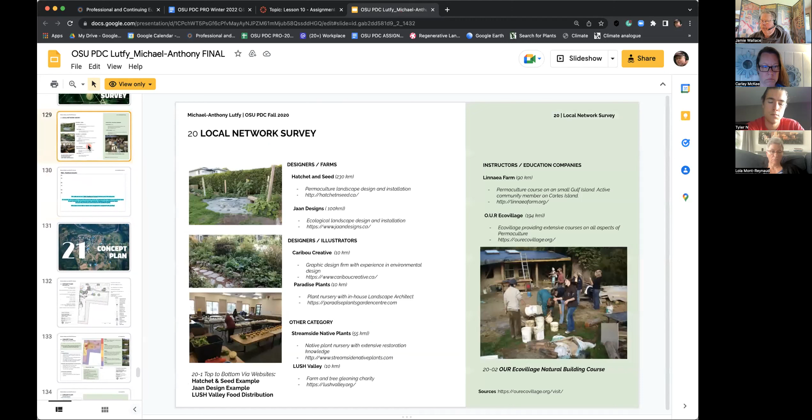And that part of the assignment is pretty brief. But the main event, of course, is the concept plan. So this is where we're going to pull in a lot of your work from previous weeks, as well as building on this a little bit.

So we can see the concept plan. Now, this example may not include all the things that we've asked for, because we have changed the template just slightly over the last couple of courses. So here you can see that we do not have a base plan.

If we go back to the concept plan and what's being asked for, we definitely want to see the existing plan. So it's just a matter of copying and pasting in your site plan or your base plan into that first sheet. And then the concept is exactly that: what is the overall intention of your design?

In this case, this is actually a nice way of doing it, where we have the base plan sort of diminished, in a grayed out format. And then all those new elements have been dropped here in color, which makes it really easy to see what some of those new intentions are.

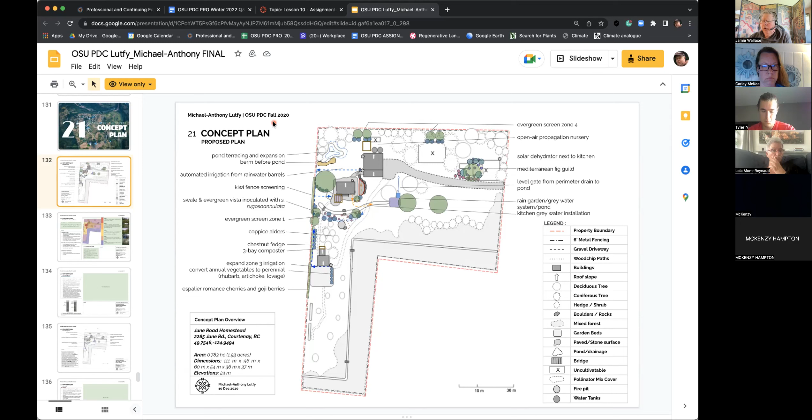And if we go to the next section here, we're looking at design goals and the proposed zones. So this is always a really interesting part of the design, to see how this concept has affected the proposed zones versus the existing ones. Sometimes that can be quite subtle, and in other instances it can be a little more dramatic, depending on the existing conditions. But in this case, it's pretty obvious.

So we want a statement of purpose - there's always a reason that you're creating the design. Just a kind of broad overall purpose and mission statement, and then some specific goals that are really helpful. Here there was privacy and an increase in diversity and native beneficials. That's great to see.

There's a note here about some of the changes to the proposed zones, which is very interesting, and then of course some images. So this one sheet tells you quite a bit about this person's drawing. Okay, so that is the concept plan.

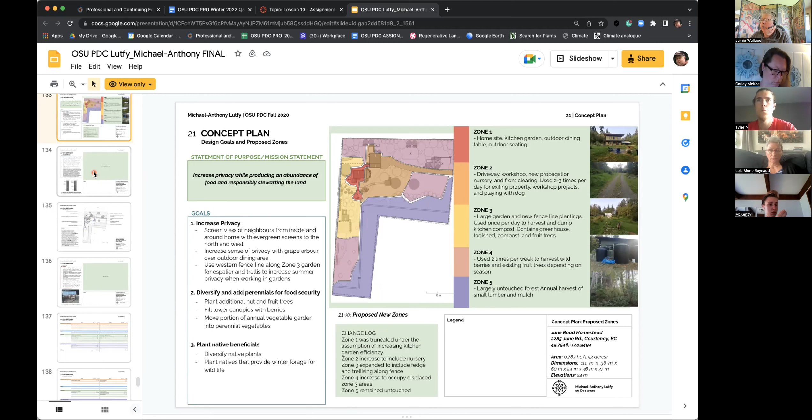So the next sheet that was included was a water management plan. When my wife and myself, our company, do a design, it's slightly different, but we definitely prioritize water, and I would encourage anybody continuing with this kind of work to also really dial into that with all the drawings. We really feel that drives the landscape. But again, this has some really good elements within it.

And this is 2 pages - the person couldn't fit all of this information on one page. So there's some notes here for rainwater catchment, for slowing down water using the gray water, and some micro irrigation, a little bit of earthworks. And then a note here about an existing pond and a level gate for the rain garden.

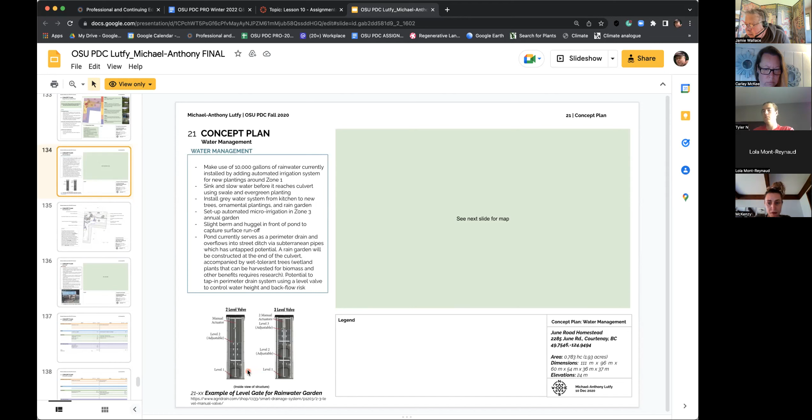I haven't taken a look at this, I'm not exactly sure what they're trying to do. I'll have to take a look at that in more depth. And then the drawing itself with some nice labels here and some notes.

So one of the things I always try and do is set up a design sheet so that if nobody knows the site, they are able to navigate through the drawing as best they can with clear drawing, clear labels, and these notes here. So without explanation, we can tell quite a bit here.

We can see the water flows, we can see the intention of a swale, some irrigation expansion. There's a large rainwater collection system here that then overflows into, I believe, a berm or a pond. So there's a lot of really interesting items in here, and that's great to see.

Now, of course, on acreage, you can do more with your resources. But one of the things that I hope people are taking away from the course, with regards to water management, is to interconnect all of your strategies. So it's great to harvest rainwater, but what happens when that system has been filled? Where does the overflow go?

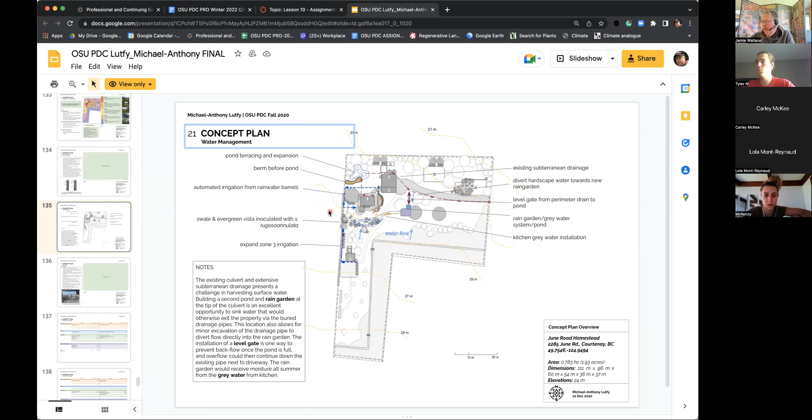And again, we have some notes here. The next slide looks at the soil fertility plan. Here, a very broad brush approach is being applied to increases in soil fertility. So instead of a silver bullet, a one-shot approach, there are multiple approaches, and this is great to see. This makes for a more resilient approach to improving soil.

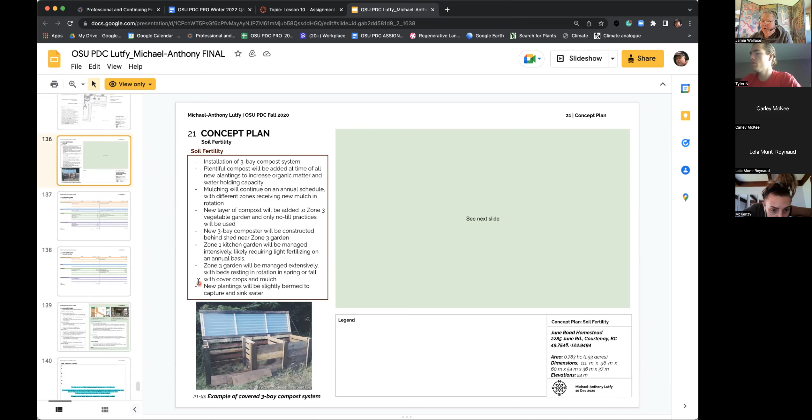So that's compost and how the mulching is going to be applied, the composter itself, what to do with the kitchen garden waste, intensively and lightly fertilized areas. So different approaches for different areas.

And that's pretty much how I'm sure you'll see your project sites as well. So if you have a kitchen garden in zone 1, it needs a lot more maintenance, and it's also going to require different soil management practices. If you're getting 2 or 3 crops a year out of your kitchen garden, extracting all these crops, you're going to want to really think about how you can add back to the soil all of that biomass you're removing.

Then we go on to the phasing and the budget, and this can be pretty tricky, admittedly, but there are some obvious things, and often infrastructure is one of them. So any earthworks or work on your water is often at the beginning of any project. Once you get to actually planting, typically with our workflow, we're getting towards the end of the project—these other items come first, mainly because the planting is really like the icing on the cake. You wouldn't want to beautify an area and then have to go and undo something or tear into it. So hence doing your infrastructure early.

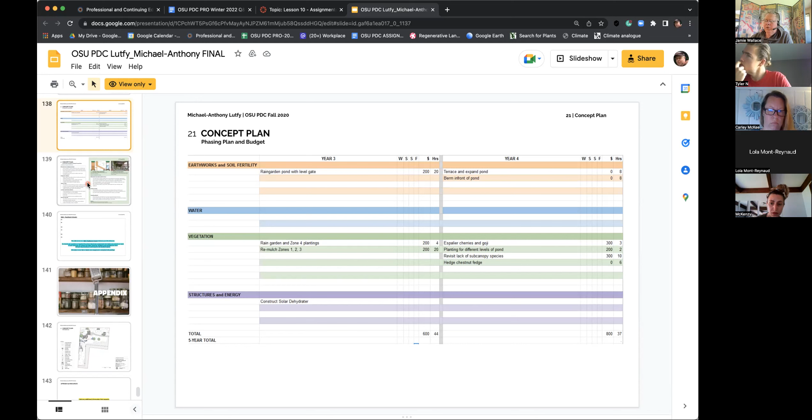And eventually, after you've done it a little while, you can almost start narrowing down these costs into per square foot values. So if you're creating 1,000 square feet of planting, odds are you might be able to nail it per square foot. For us, we're probably starting in and around $10 a square foot, and it may be higher than that. It's not any way to bid it by any means, but it does give you some rough ideas on how to go forward with that part of it.

And that's probably one of the most challenging things about designing: coming up with a great idea, and then trying to determine how much that's going to cost. That can be quite tricky, and it really goes way back to our first assignment, where we went through the client questionnaire and saw what their budget—I won't say can handle, but certainly dialing into what's realistic for the client and what the design is going to be. After you've done it a while, you try to keep that in the back of your mind as you're designing. But that is a little bit tricky, and it does take time to get used to.

All part of experience. So the last part of the assignment here, we're looking at principles and social permaculture. These are pretty straightforward. It's very interesting to see how some of these principles apply to the design you've done.

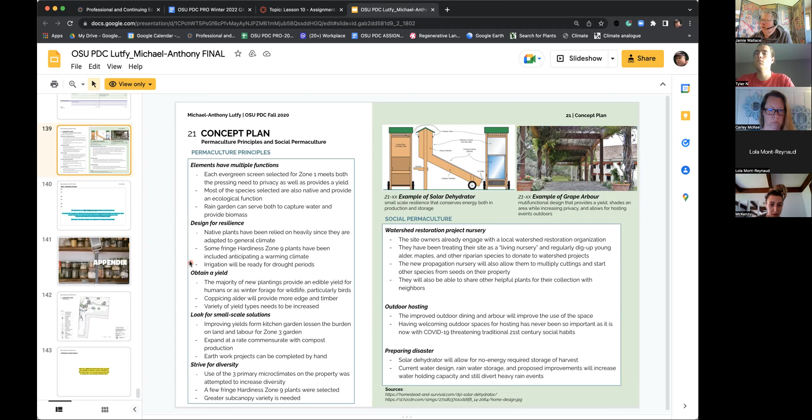And that's about it. So that is one of the student examples.

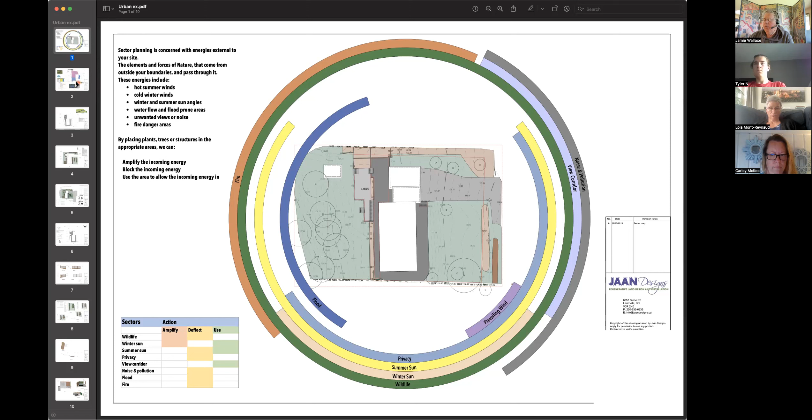So this is how we would do our sector analysis. This is one of the first things that we show our clients and get feedback from them before we proceed any further, because we would definitely want to make sure that we're covering this off before we put some ideas to paper. And then what we do after that is we jump right into the water layer.

We're looking at all that on-site water resource and what we're going to do with that. In this example, we're taking water off of the roof and the patios, and we're sending it into a rain garden. We put a little example of what a rain garden might look like, and some numbers, some catchment numbers, what's coming off the roof.

Based on our annual average rainfall, which is around 1,100 millimeters per year, we're showing all the impervious surfaces here, as well as a micro watershed. So this is a Google Earth image where I got contour information, and we could track just how much water flows from uphill behind the site.

It's very interesting because we've been on that site for a couple of years now doing different phases of work. And there is a huge volume of water that flows along this hardpan layer that's about 3 feet deep that we encountered when we were building walls in the back here. So it is a substantial volume, and fortunately we have planned for that and are making use of it.

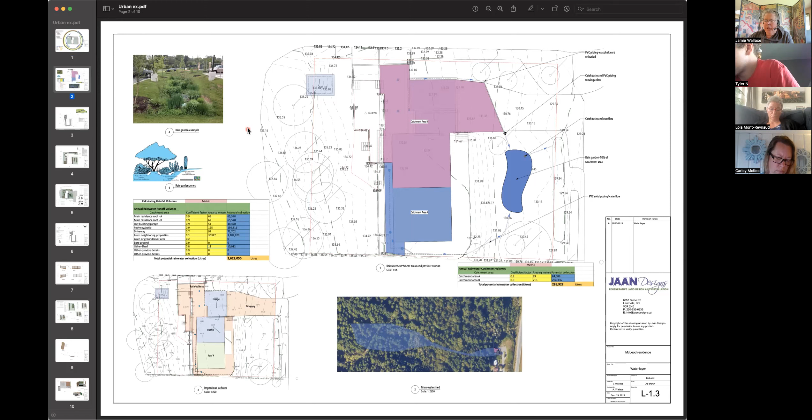So the next thing we look at is access, and that's kind of taken from the Regrarians platform where there's 10 or 11 different layers, but access is a biggie. So that is foot traffic patterns. For us, that's patios.

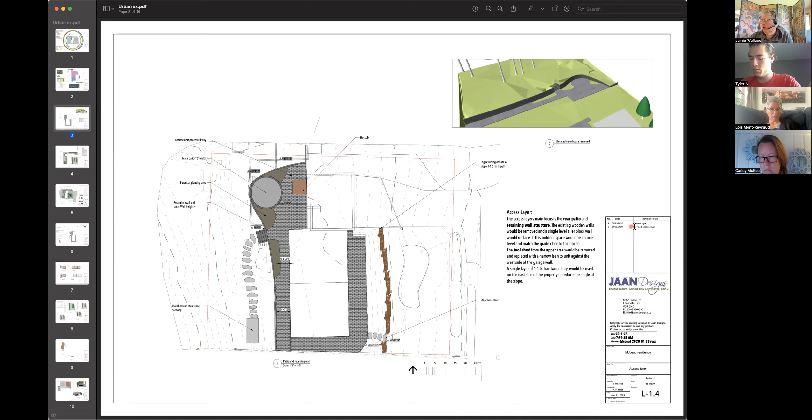You can see there was an existing railway tie retaining wall here that we're going to remove and put in a new patio with some plantings. Not a huge change, just expanding it a little bit. And then we have a little 3D image of it, and then some notes. And then you can see here we have revision notes - so we presented that, and then we've revised it a little bit based on feedback.

And then we get to the soil layer, which is all that living material. And with this wall, we're planning to soften it from behind and in front. Uh-oh - I'm just going to bring up a couple of pictures of that. I can find out.

Okay, we'll let that load while we're looking at this. So yeah, this is just looking at soil. And when I say soil, that's all living things. So these are intentionally planted areas. This is turf, it's an enclosed veggie garden. And then this is the rain garden, and then another bed here. Now this changed a little bit.

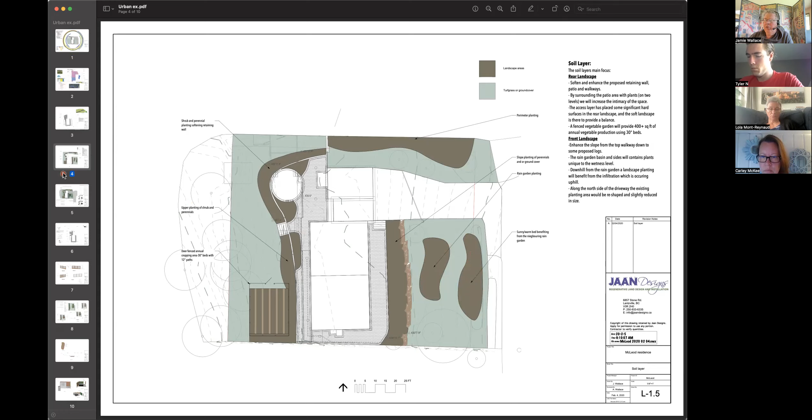And then there's our planting plan, where we specifically identify each and every individual plant that's going on the drawing. And then we have plant lists on both sides. This is for the front, this is for the rear of the property.

So now, if we back up a little bit, I didn't include one critical part, which is the concept. The concept would be this minus these specific plants. And that's where your drawings are going to be stopping. But if you were to continue along with them, you would want to dive into details, right? The details in this case are a full planting plan. I'm not going to really dive into specifics there.

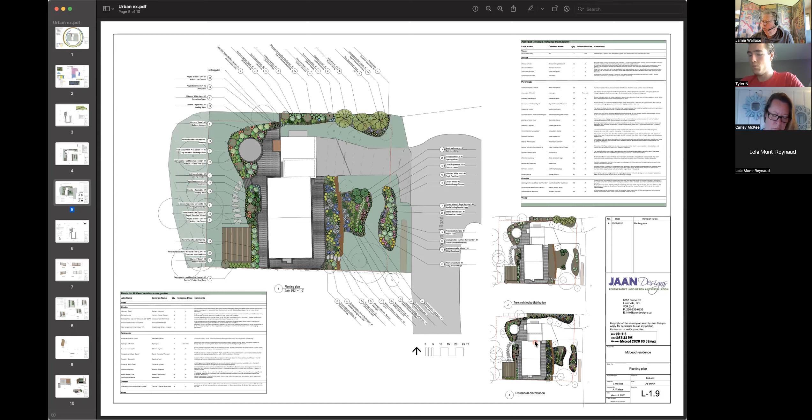This is an interesting thing we do, is we separate, give people an idea of the tree and shrub component versus the herbaceous perennial component, so we get an idea of what proportions are there.

And then we've added details about the wall. So you can see this is a side view of the proposed retaining wall and how that's built, and the height. We're going to max it out at about 3'10", and that's the maximum height we could go without needing any engineering. This is an Allan Block wall, so it's pre-engineered, which is great. So we know we don't have to get too worried about the specifics here, other than following recommended manufacturer's recommendations.

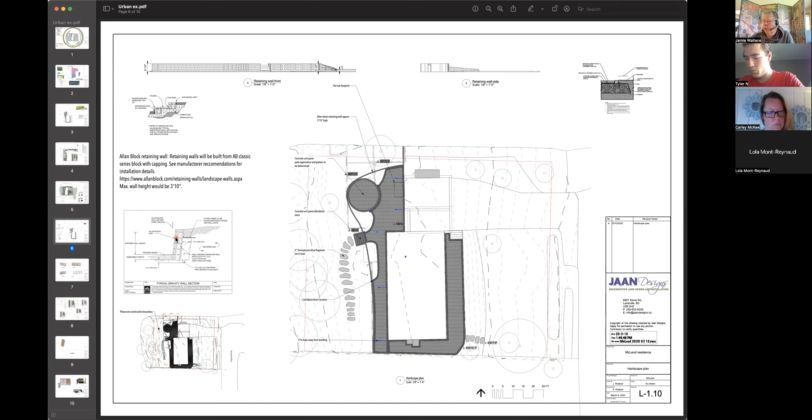And then we did an enclosed vegetable garden. That was on a slope. We had to figure out how that was going to look, so we did some details for that.

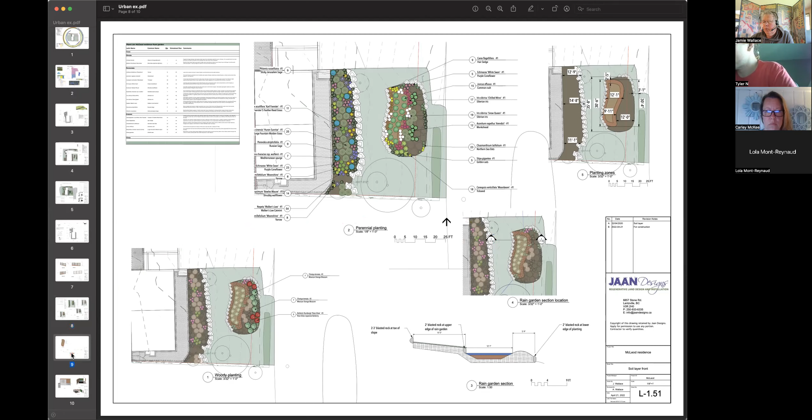Then we changed the front, and the rain garden got pushed downhill. So we just did this quick sheet that we printed. We're right in the middle of creating this now, that'll be tomorrow. And then a little detail on our rain garden.

There's a side view. And while we were excavating this rain garden, we encountered the soils we expected until we got to the very bottom, and we hit a clay layer, which is exactly what you don't want with a rain garden. Maybe for a pond, but not a rain garden. We want that water to infiltrate. So we had to add in a little drain network there, just so in the winter we are able to allow water to flow out of that rain garden and not create a big mess.

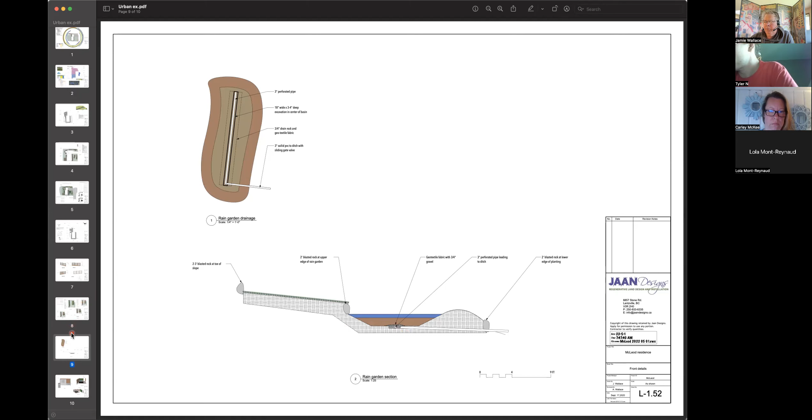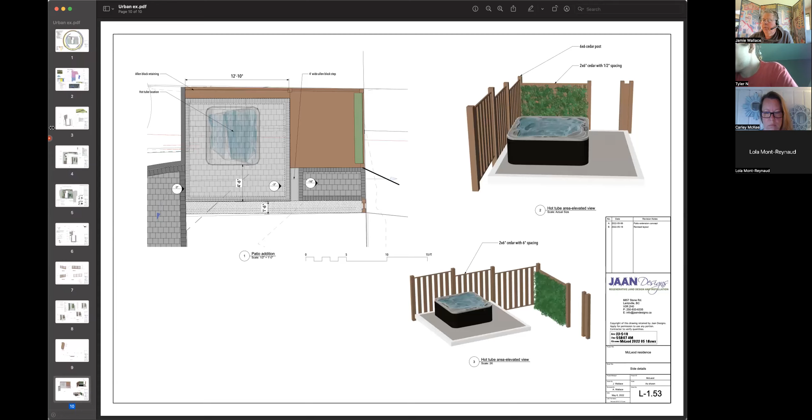And then here's a few details on the side of the property where the clients want to put a spa and extend this patio. We've just slapped together basically a few details for that. Let me just show you.

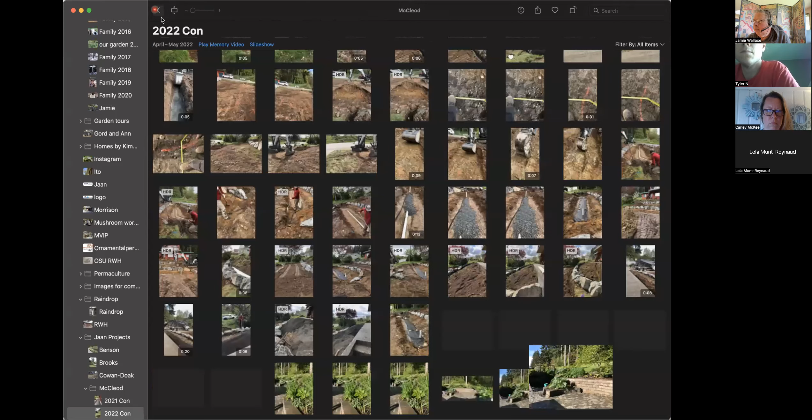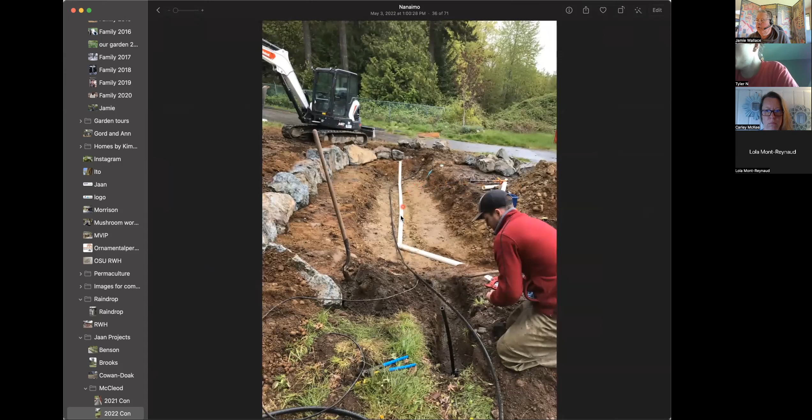Let me just take a look here. So here's our rain garden. And because it was on a slope, it's a little bit tricky, much like a pond, Carley, where the rain garden itself has to be flat. And if it's sloped, we had to retain the top portion of it. The flooding height of this will be basically the base of the stones. So when we get a big rain event, water is going to come up and pool here.

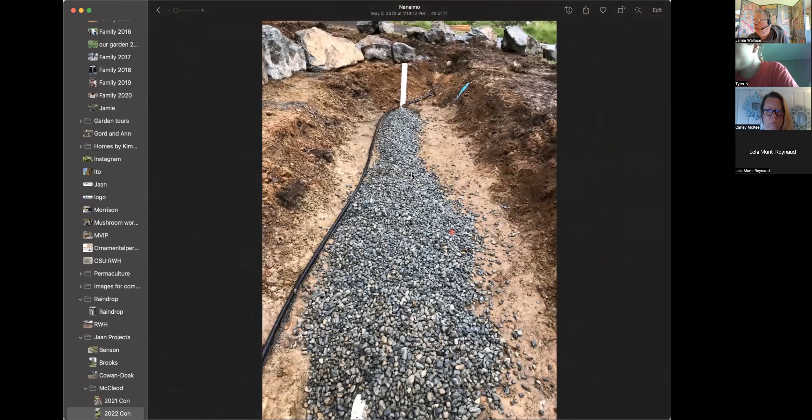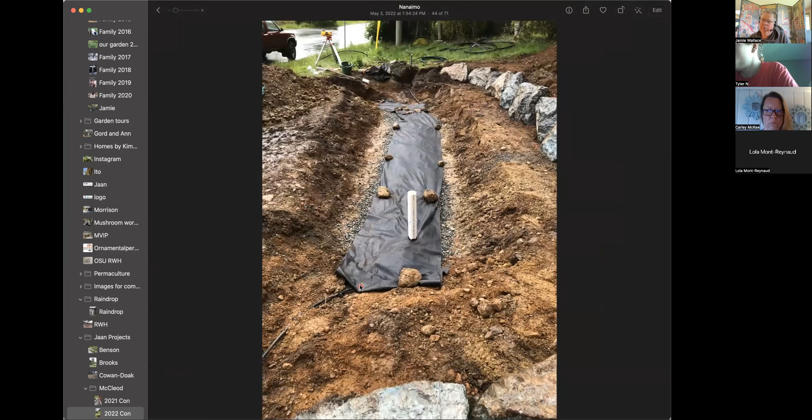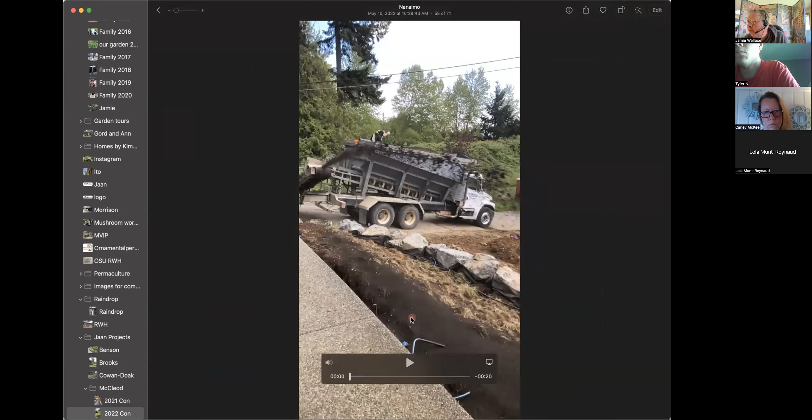And we put perforated pipe and some gravel in place, and then we put fabric over that gravel to preserve it. We don't want to have soils intermingling with our drainage. This is a clean out that we're putting at the end, that you won't see. And then we got topsoil in. If you're ever putting soil in an area and you have the right access, this is a wonderful way of doing it. A slinger truck - they're expensive, but...

This is a bed at the top here that the owner had to mow and did not like, so we're vegetating that.

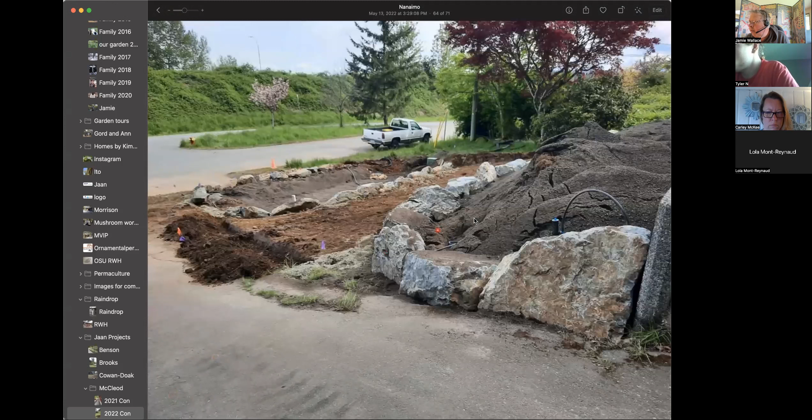This is kind of where we got, not quite done, but you can see all our irrigations in place. The rain garden has soil in it.

So we excavate the rain garden, going back to allow for a foot of soil at least in the bottom of it. And then we account for 6 inches of pooling height, so if there's a big rain event and it fills up and that soil is at capacity, the water will come up 6 inches above it.

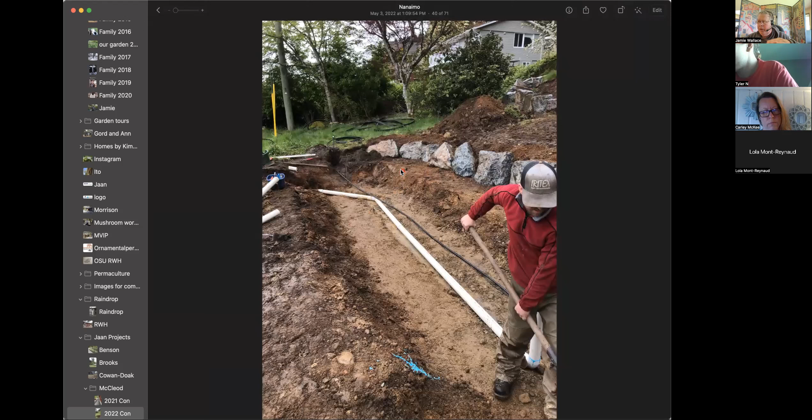And then we have an overflow built in - a little catch basin here. We also have an overland overflow that's going right into a ditch over here, so that if for some reason this fails, the water's still got somewhere to go.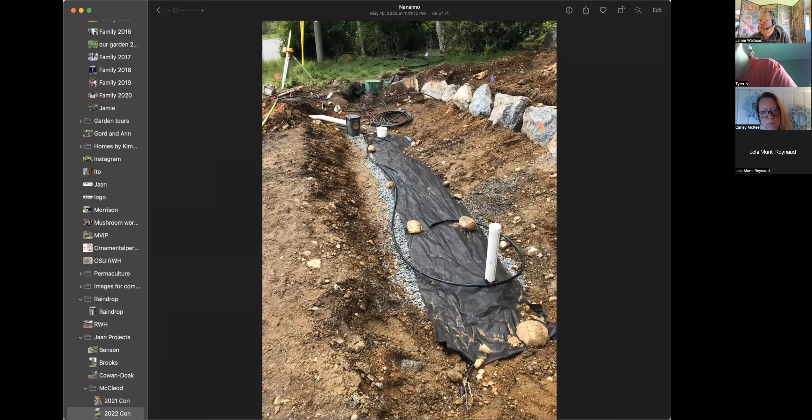And of course, this is all in a very rough state, and we'll be updating. That's a bit of a blurry picture, but that's kind of where we were at.

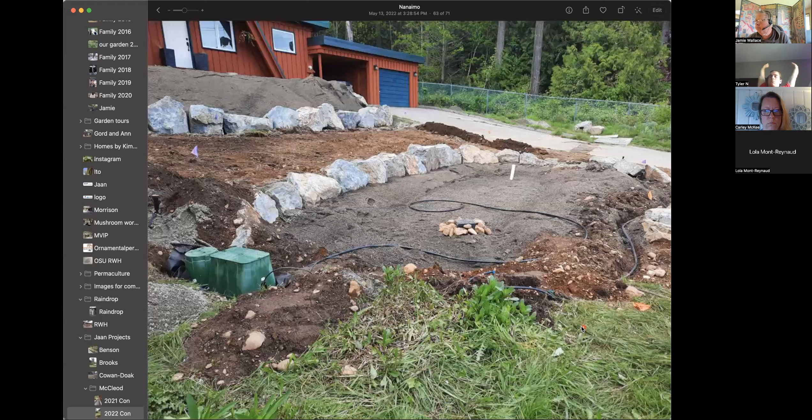So that's our backfill at the rain garden. And then this is kind of zone 1, the bottom, and zone 2 will be on this edge. And then we have a big planting back here that is yet to have soil put on it. I think that's about it, but here you go.

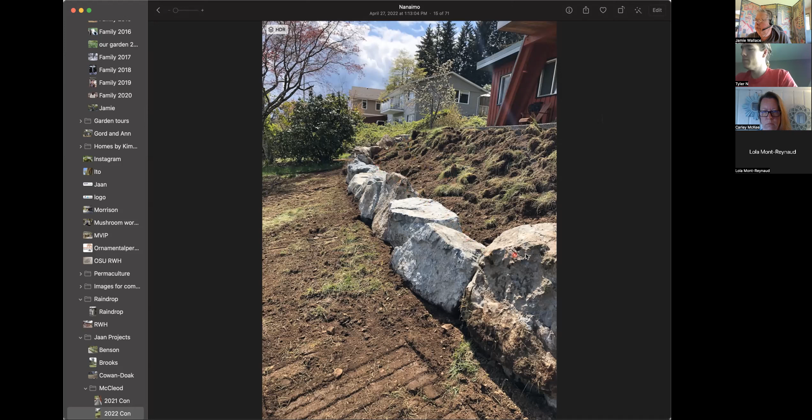Here's where we started - this vegetated area. And then we placed some of that turf that we stripped off. We put it back up on the bank and actually flipped it upside down because we wanted to retain as much soil life as possible. Then we ran our irrigation in here before adding topsoil. So that's kind of the process we go through.

I don't think there's anything else in here that's too exciting right now. We've got it planted now. I don't have any pictures in here of that, but yeah.

I do have one other example to show you, and it is far less complicated. Maybe we'll just quickly do that and then call it a day.

So here is a drawing we did for a young couple in an urban site. And much like the previous one, we start with the sector analysis, and we determine...

You'll also note, some of you will get a kick out of this - I'm not north up here. I'm just a few degrees off of it.

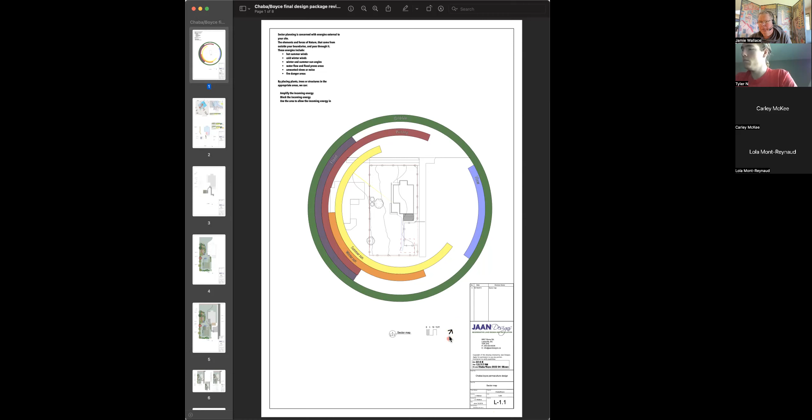But then we do our water layer, where we're identifying some impervious surfaces and what we're going to do here. So here we're actually putting a little swale at the top of the property, and then it's going to overflow into a rain garden. As well, we have an outdoor patio with a covered area and some liquid tote containers for collecting rainwater off the roof, which will overflow into this small rain garden as well.

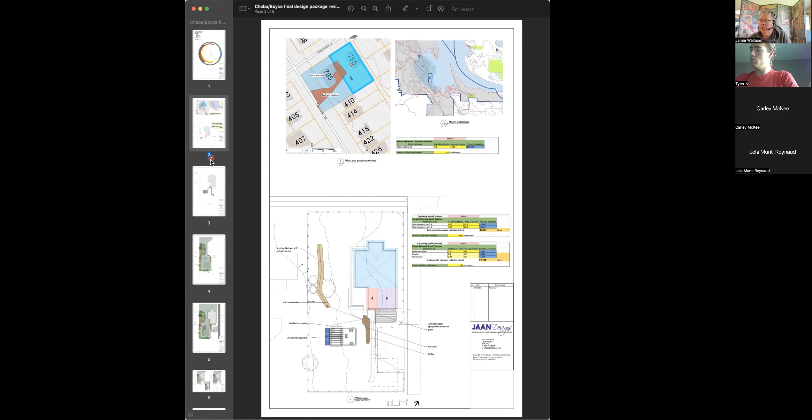This is the access - so we have a patio and a walkway and the roofing here. And then this is the overall concept. Oh sorry, this is the soil layer, with all the plants added, and then we get to the concept itself - this is the broad view of it.

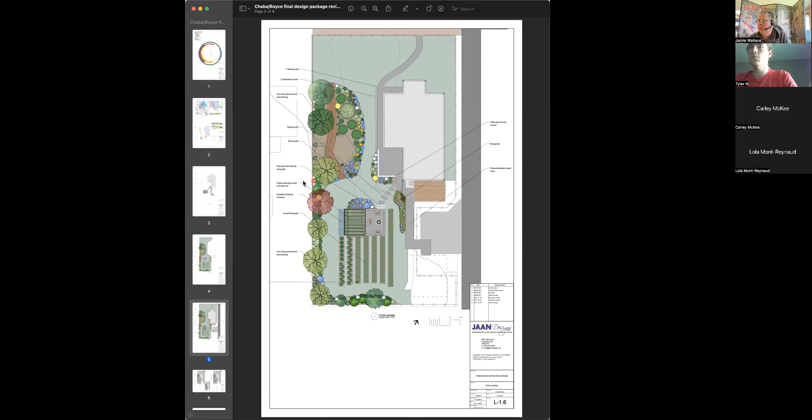And this is basically going to be a very productive edible landscape for these people. And then a couple more details where we had a full planting plan with a planting list, and then some details with their patio, the pergola, the roofing, and a little bit about their rain garden.

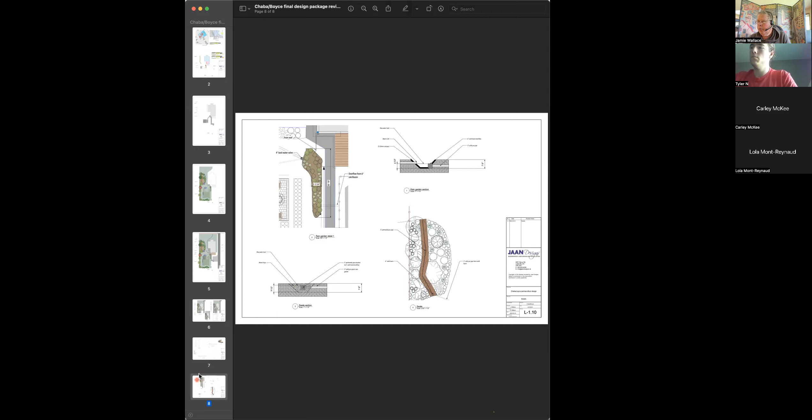So yeah, that is about it for that. Does anybody have any questions to wrap up today with, or are we feeling pretty good about this last lesson? I guess we're all good. All right.